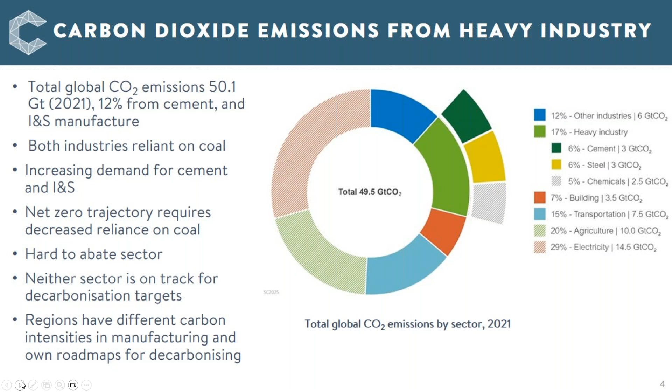There's also interest in many of the roadmaps. There's also a push for electrification of processes and increasing renewables on the grid, so that the CO2 emissions from electricity use in these sectors also decrease. And then, of course, we have technology switching and fuel switching, which is where biomass comes in, and we have carbon capture and storage. So if we look at the iron and steel one, at present, the blast furnace route for iron making dominates globally. I think it's responsible for about 70% of the global steel manufacturing. It's the most carbon intensive.

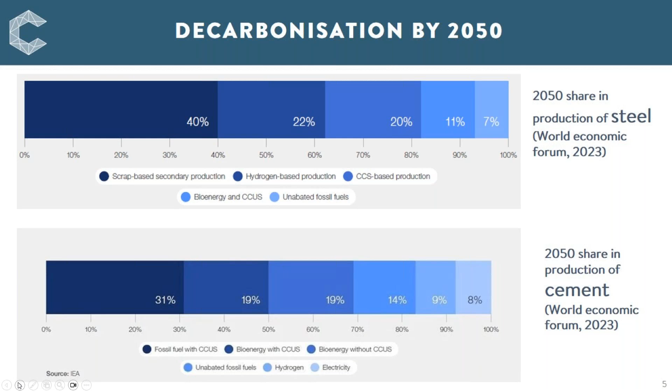So that's fed into the top of a series of cyclones where the raw meal undergoes drying and preheating before it moves to the calciner. And in the calciner, this is where the calcium carbonate is converted to calcium oxide with release of carbon dioxide. I've got the numbers later, but a large share of the carbon dioxide release is inherent in the process. This is why carbon capture features strongly in decarbonisation roadmaps for cement.

Now, the heat for these cyclones is coming from the kiln. So after the calciner, the calcined meal moves into the kiln, where it sees a gradually increasing temperature as it travels down the kiln and undergoes sintering to produce the final clinker. So traditionally, the heat in this kiln is provided by fossil fuels, and the thermal energy use in the manufacture of cement is about 38% of the total energy. So there's opportunities to substitute 38% of this total energy by biogenic fuels.

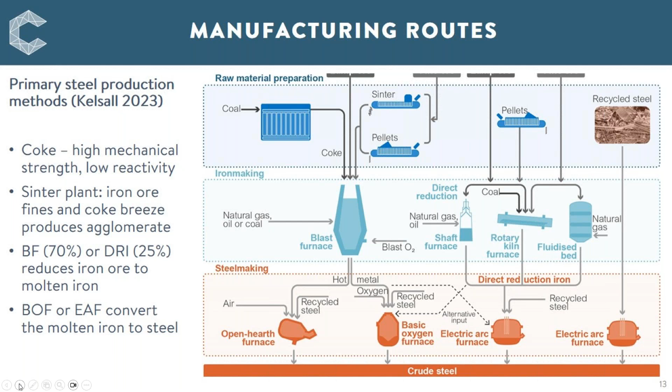The other trajectory is the sustainable development scenario, and this scenario is more in keeping with the goal of reaching net zero of the whole energy system by 2050. So there's not a plan to decarbonise the sector to zero, but there's a plan to more or less halve the emissions by 2050. And we can see where energy savings are going to come from.

Again, there's efficiency savings, implementation of best available technology that will improve efficiency and reduce coke consumption. Electrification and hydrogen again feature strongly, and there are various processes being developed injecting hydrogen into the blast furnace or direct reduced iron to offset some of the carbon that's currently used as a reductant. There is a role for bioenergy, and from this scenario, it's estimated globally to be around a 6% reduction by 2050.

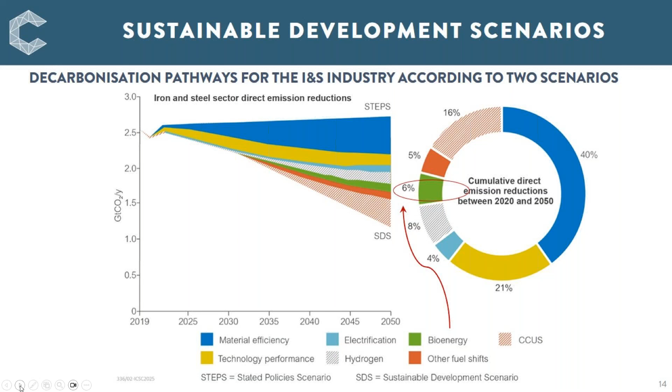But the red boxes show the places where biomass could make some substitution, partial substitution for coal or coke material. So in the coking process itself, in the sintering process, in the carbon agglomerates that are added in the blast furnace, and also in the coal that's injected into the blast furnace. So these are some of the routes where biomass can come in. There's no carbon added in the basic oxygen furnace.

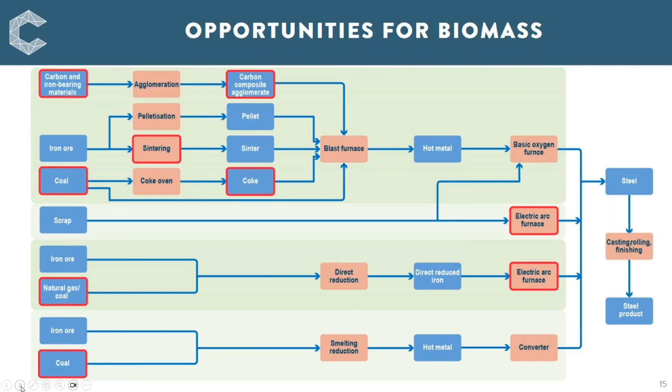And then in direct reduced iron, those processes that use coal, you can substitute for biomass, partial substitution. And actually there's carbon added in the electric arc furnace. So that is an opportunity for biogenic carbon substitution as well. So I just want to spend a little bit of time talking about a couple of those processes in a little bit more detail.

So we add in our iron ore, sinter, fluxing materials at the top, coke that's added at the top. Eventually it will act as a reductant, but it's also acting as a permeable mechanical support, and it will also provide some thermal energy as well. So it needs specific properties if we're looking for substituting coke for biogenic sources.

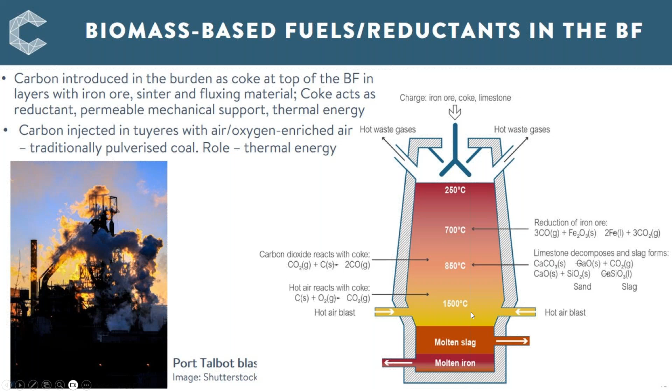The other place that carbon comes in is in the injected tuyere region at the bottom of the blast furnace with air or with oxygen-enriched air. And this is where pulverized coal comes in. And here, the requirements are a rapid reaction, rapid release of thermal energy. And as I said, traditionally that's pulverized coal, but this is a place where biomass and biomass-derived products can be added. The other process I want to look at is the electric arc furnace.

And carbon actually provides a role in the electric arc furnace. So there is added carbon in the process. We have scrap material going into the electric arc furnace as well as direct reduced iron. This contains some carbon materials, some residues, oils, grease. There's carbon in the direct reduced iron as well. But sometimes carbon is also added in here. So coal and coke are added and other alternative fuels are added. And it provides a large fraction of the thermal energy needed to melt this iron down and start to remove carbon from it and form steel.

The other place that carbon comes in is these oxy-fuel burners that also provide heat in the electric arc furnace. And then, of course, the rest of the energy for melting this mix comes from the electrodes, so it's electrical. So it's not a highly carbon intensive process, but we are adding carbon into this system.

And the injected carbon is important. It starts to form bubbles of CO2 and CO and so on as it burns, and that CO moves through the melted material and through the melted slag on top, and it starts to produce a foam within that slag. So the slag becomes a foam, and that protects the walls of the electric furnace and protects the electrodes as well.

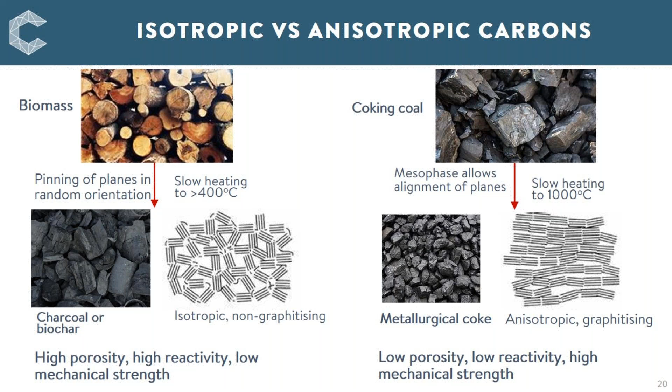And actually, most of the research in that area is, sorry, I'm getting ahead of myself. Most of the research in that area is around how much biomass you could substitute into coke making and still have acceptable quality coke. So carbons can be anisotropic coke or isotropic charcoal, depending on the precursor, and the inherent porosity and reactivity of charcoal and biochar affects how they can be used in iron and steel manufacturing and how much could be used.

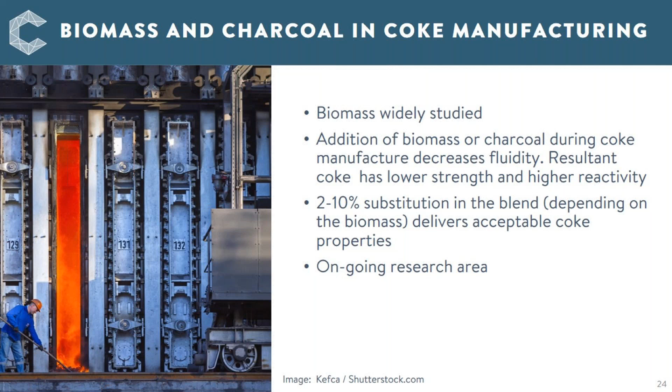Another area that has had a lot of research and development, and is actually at one of the highest technology readiness levels, is injection of biomass or charcoal into the blast furnace, at the base of the blast furnace. And here you want a small particle size, it's pulverized, and you want rapid reaction to release the heat quickly.

And actually pre-treated fuels, thermally pre-treated fuels like torrefied fuels, charcoals, have more attractive calorific value and grindability than biomass itself. So there's a lot of interest here in using torrefied materials, biochars, and other types of pre-treated biomass, hydrothermal carbonisation, and so on.

The conveying and injection of those thermally treated biomass at a high rate is still a challenge, and also, of course, those types of fuels are more reactive, so the dust explosivity needs to be considered from a safety point of view, and suppression equipment installed and all the rest. But there is very good potential, especially for charcoal.

The research has shown that it gives more complete burnout than some of the coals that are used, which means that it's higher efficiency. So it lowers the coke consumption. There's less coke being used to provide thermal energy because you've got good reaction of the charcoal in the hottest parts of the blast furnace. And actually high technology readiness level has been achieved, and I've got a case study to show that in a moment.

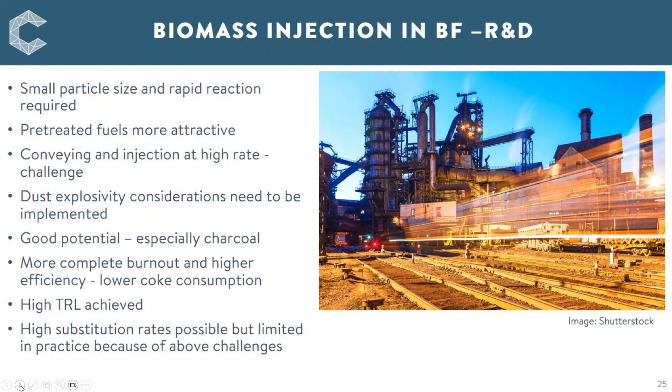The other place that biomass is being used is in the electric arc furnace. There's been a lot of studies in this area, and actually at quite larger scale. It's easier to study in that system. It's smaller scale than a blast furnace. It's a batch process, so it's easier to undertake trials. And the biomass has been added either as charged carbon or as injected carbon.

And most of the focus for the injected carbon, as I was saying earlier, is understanding how the substitution of coal for biomass products affects the slag foaming behavior, which isn't fully understood. And also, there's been a lot of laboratory work, and scaling that up to how it will actually implement on a large scale isn't fully understood.

So probably injected carbon is at a slightly lower technology readiness level than the charged carbon. And for the charged carbon, it looks like it's probably ready for implementation, as long as the ash is low enough in the charged carbons. Wastes and residues are of interest, and actually there's alternative fuels being used as well in the electric arc furnace, like tyres and so on.

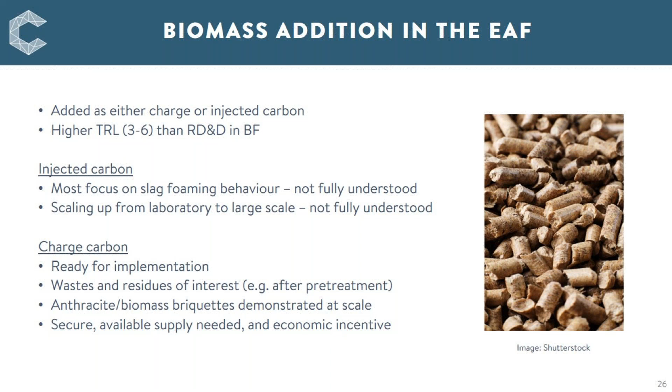So just to point out some of the things I've said, the charcoal addition in the mini blast furnaces has been done at scale, and has displaced 100% coke in a few plants in Brazil. It's been demonstrated there, and also charcoal injected into the base of the blast furnaces.

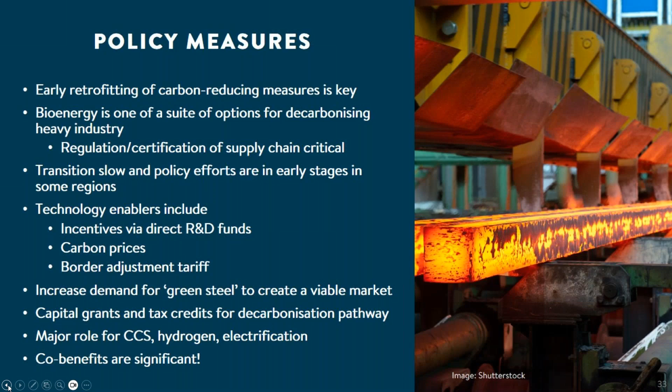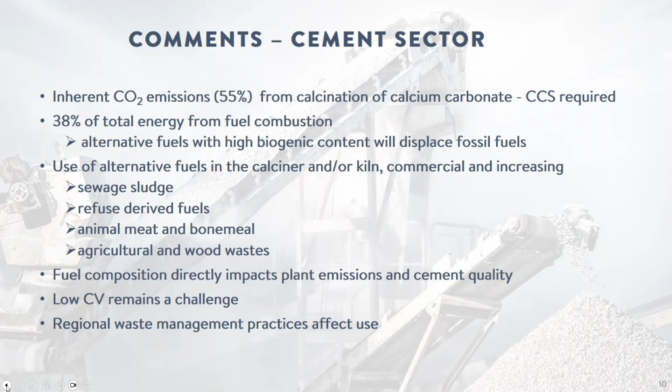And that's when they have proposed to use gasifiers, for example, in pre-combustion burners to pre-treat the fuel, to pre-burn the fuel prior to introducing it into the calciner, for example. But these are not as widely used, I think.

Great. I think this might be the last one we have time for. If existing cement plants incorporate bio into their process, does that affect emissions in any way, the flue gas? Do you want to take that? It does have an impact. The fuel does have an impact on emissions, but overall there has been seen a reduction in NOx because of the lower nitrogen content of biomass in general, and

also in sulfur oxides. Yeah, the other thing about the kiln is that because of the conditions in the kiln, it's amenable. The conditions prevent or minimize the route to dioxin furan formation. So if you are using fuels that might be susceptible to producing those, the kiln minimizes their production. The conditions in the kiln, the long residence time, the high temperature. I mean, the kilns are considered better. Sorry, Jen. No, carry on.